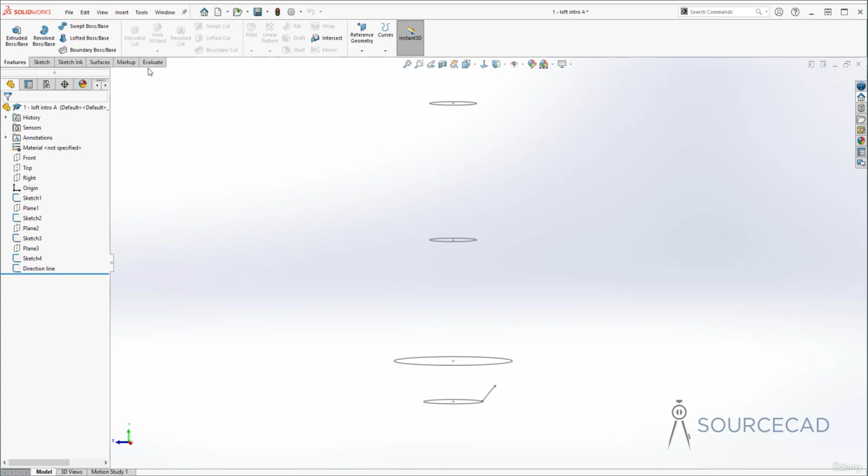For example, I'll go to lofted boss base feature again, and I'll click here for the first point, and for the second point, instead of clicking here, I will click maybe here. And as you can see, now it will create this kind of twisted profile because it is connecting it like this. Now you can also click here, and maybe finally I'll just click here. So now we have a completely twisted profile because of the way these connectors are now connecting all of these sketches.

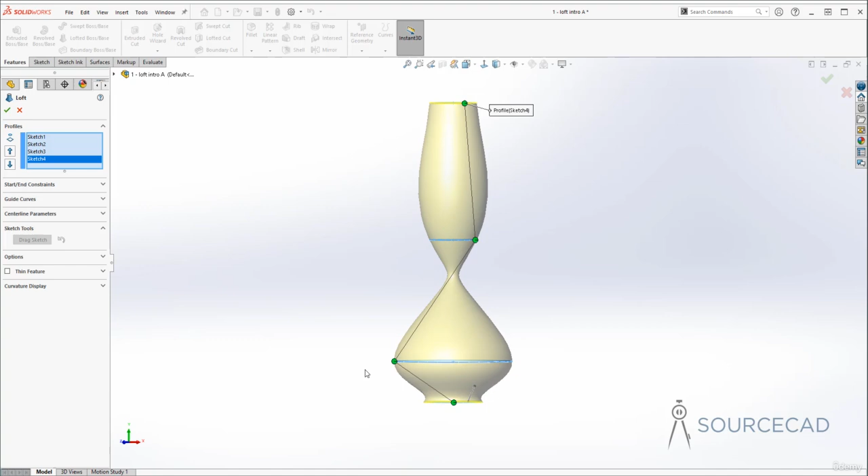Now, if you don't see these connectors, simply right click on this loft and select this option, show all connectors. And you can also hide these connectors if you want, but in this case we do want it, so show all connectors. Now you can also move these connectors, so grab this one and move it right where it should be. So here, as you can see, we can actually move it pretty easily to the correct spot, and it looks like I just twisted it just way too far, and this looks kind of okay. So this is how you can move the connector.

So I'm going to just align it along a single line, and as you can see, it is a little bit tricky to kind of align it using cursor, but you can do it nevertheless. So here we have it. Once you are satisfied, click OK, and we have this first lofted profile.

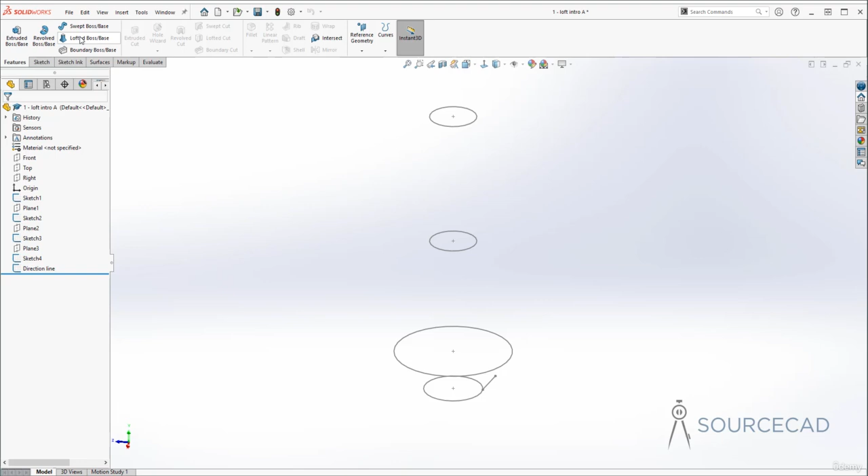Now if you don't want to select the sketches using these connectors, then you can also use these sketch tools from here. So you can directly select the sketches from here, and SolidWorks will automatically pick the right point for connecting these. So I'll go to lofted boss base again, and this time instead of clicking on these circles, I will now expand the feature tree, and I'll start selecting from sketch 1. So sketch 1, then 2, then sketch 3, and finally sketch 4.

And in this case, it will automatically align the connectors right along a single straight line. So this is another method of kind of creating these lofts. So I'll click OK, and here we are. We've got the final lofted feature.

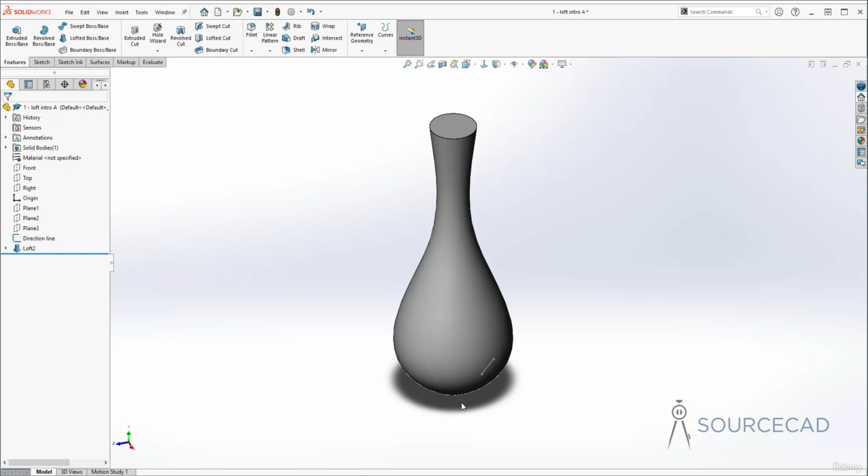Now you can also modify the way these loft ends are connected. So right now it will just follow the lofted profile, but if you want to give it different shapes right where these things are connecting, then again you can modify this loft. So I'll just select this loft instead of creating a new one, and now I'll just select edit feature. Alright, now here we have a thing called start end constraints. Just expand this, and this will let you change the way these lofts are connected at the starting point and end point.

So I'll start with the start constraint, and that's going to affect the way this loft is connected at this starting cross section. So right now it is set to default. I'll just select normal to profile, and now it will automatically just make a lofted shape which is normal to the profile. So this is the profile. It will try to keep it normal to this profile. So this is what we are going to get.

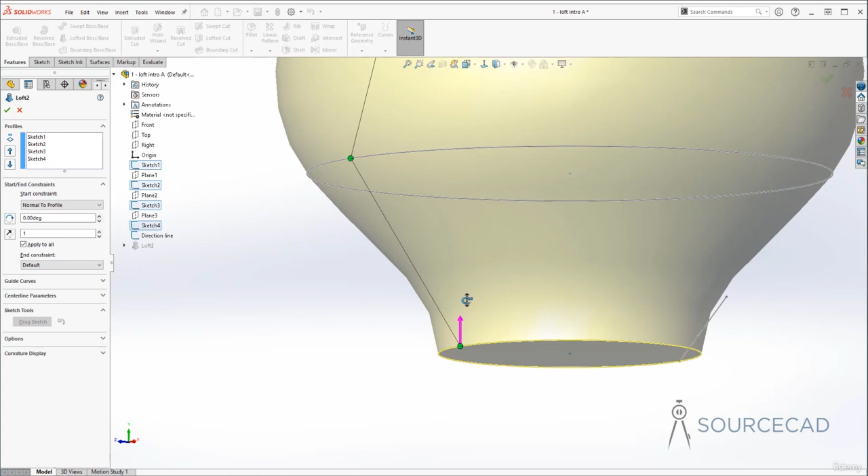Now in this case, it is not completely normal because of this angle. So it is already using an angle of 29 degrees with respect to normal. So I'll make it 0. And now it is perfectly normal, which is at 90 degrees to the starting cross section. So this is what it is going to do if you select normal to the starting profile.

Now in a similar way, you can change the end profile. So I'll go to this end constraint and I'll make it normal to profile. And here also, it will make it perpendicular to this. So this is how you can just change its shape, but I don't want it. So for the end profile, I'll keep it at default, and here maybe let's now use this direction vector.

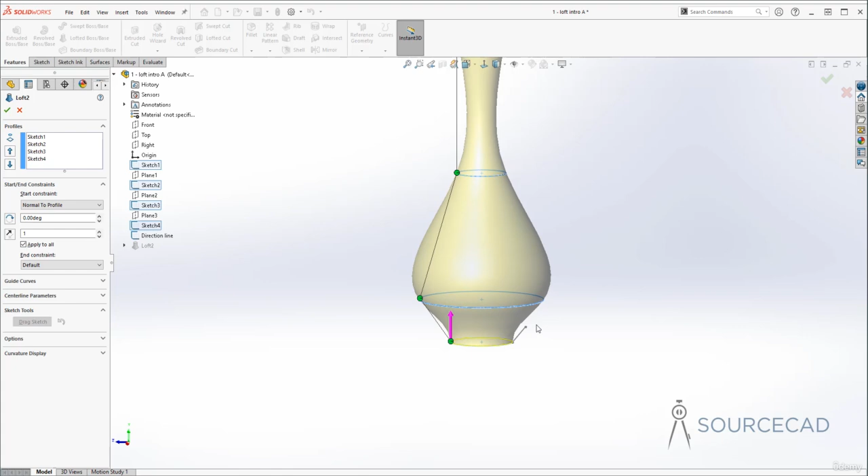So not only this normal profile, but you can also use this direction vector, but it has a problem. This will add the direction vector only along this line, so you'll get kind of a twisted profile. Let me show you what I mean. So I'll go to start constraint, and I'll select direction vector, and I'll select this one. Now as you can see, it is just aligning this lofted feature along this direction.

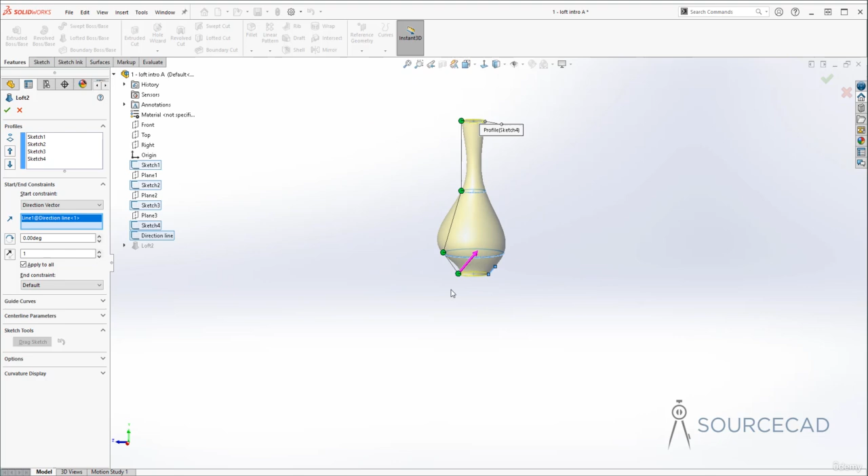So not only from this side but also from this side it is going to align it, which is not going to create the shape that we want. But for some reason, if you want this kind of shape, you can of course use this direction vector. And also you can add an angle. So when you add an angle here, SolidWorks will deviate from that direction vector and will add that angle right here. So whatever angle you want, you can just add it here.

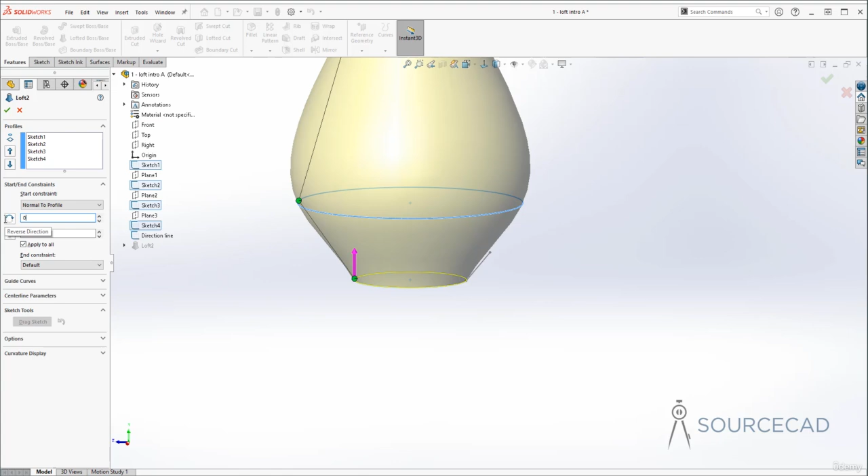Now in this case, I don't want direction vector, and instead I just want normal to profile. So I'll select that, and in angle I'll just choose 0° angle here so that it actually remains at 90 degrees. And here we have the final flower vase. So click OK and we are done. So we've got our lofted profile.